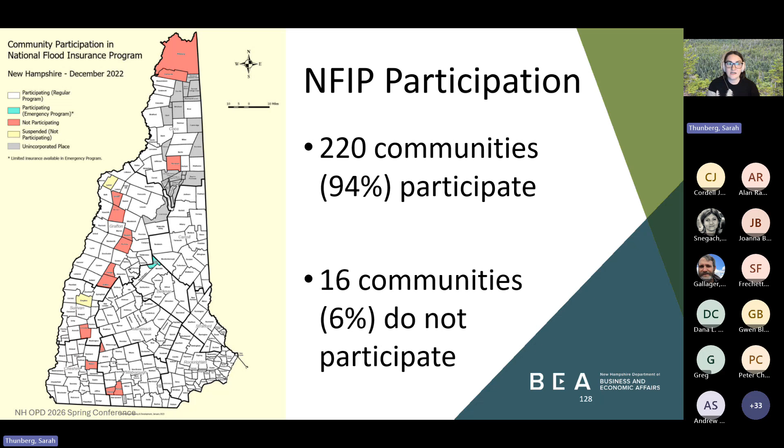We have 94% participation in New Hampshire, which is really, really great to see. And on this map, everything shown in white is considered a participating community. Red is not participating, and any yellow communities are suspended.

So there are different roles and responsibilities depending on the level of government you're working at. So I'm going to start with going over the federal responsibilities, aka FEMA's roles and responsibilities. So FEMA is the entity that makes the flood insurance through the National Flood Insurance Program available for all participating communities. And this includes property owners, residents, and renters in the community.

FEMA is also responsible for identifying the flood risks through mapping the floodplain and providing guidance on safe development and construction in floodplains. And then that translates to establishing development standards and providing guidance on safe flood-informed development within the floodplain. And then finally, FEMA is monitoring compliance for participating communities to ensure that all of the communities in the National Flood Insurance Program are administering the same minimum regulations.

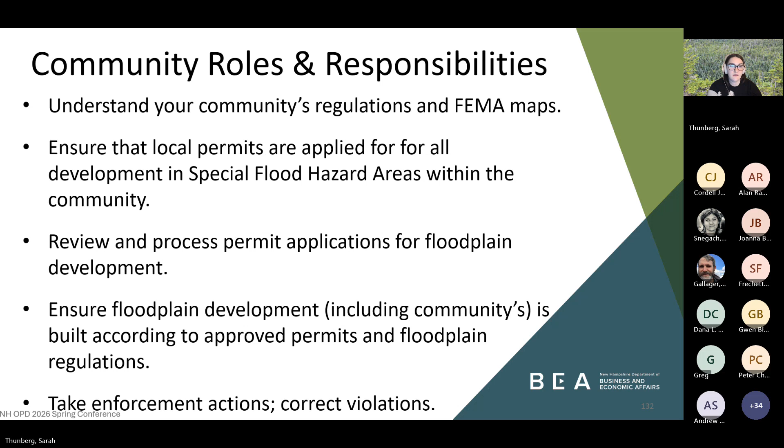Sometimes a community is not adequately enforcing their floodplain regulations, and if this occurs for a prolonged period of time, or it keeps coming up, then FEMA may consider suspending the community. In general, if a community gets suspended, property owners will not be able to purchase NFIP flood insurance policies, and all existing policies will not be able to be renewed.

Federal grants or loans for development will not be available in identified flood hazard areas under programs administered by federal agencies such as the Department of Housing and Urban Development or the EPA and the Small Business Administration. All of those loans would not be eligible for suspended communities.

Federal disaster assistance for flood damage would also not be provided to repair insurable buildings that are located in identified flood hazard areas. Additionally, if there aren't a lot of policyholders in the community, suspension can impact future property sales, such as if a home is in the floodplain and the buyer cannot get insurance, they might choose to not close on the house.

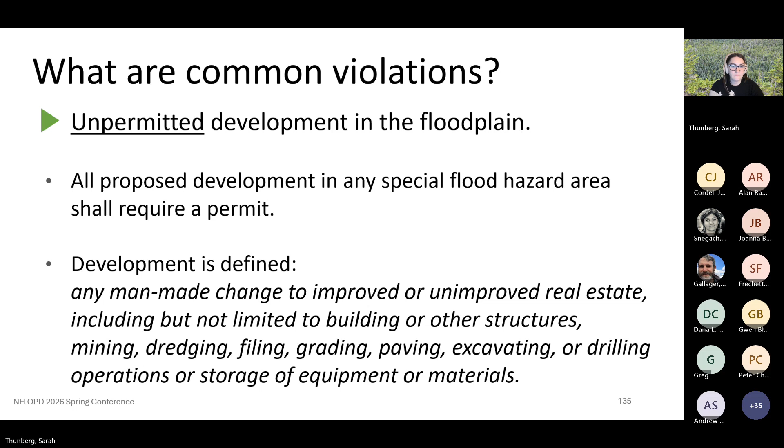So one of the common examples of unpermitted development is that structures are either being constructed or were constructed without a permit. This means that they may not meet the building requirements included in the floodplain regulations. Another example is improvements to structures without a substantial improvement or substantial damage determination.

So every existing structure in the floodplain must have a determination made for any improvements. There are a few exceptions to that rule, but generally, a substantial improvement determination is always needed. Substantial improvement just means that if you improve a structure within the floodplain by 50% of its market value or more, then regardless if that structure was built before the flood insurance program existed, that structure would then need to be brought into today's floodplain management standards.

On the other side of it is substantial damage. So if there's a structure that was damaged by more than 50%, it would also have to be brought into the modern day floodplain regulations. And a lot of communities after a disaster happens will have many structures that have been damaged and can sometimes miss the requirement to do a substantial damage determination for all those structures. And it does take up a lot of time.

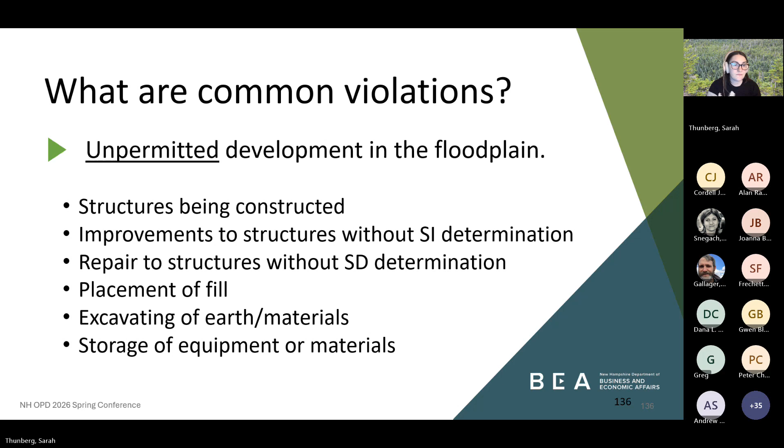So the second category of common violations is that the development in the floodplain does not follow the permit that was issued by the community. We see this a lot. So we're going to spend some time talking about this type of violation in the following slides, but some examples can include the lowest floor or the lowest horizontal member of the structure being below base flood elevation or freeboard.

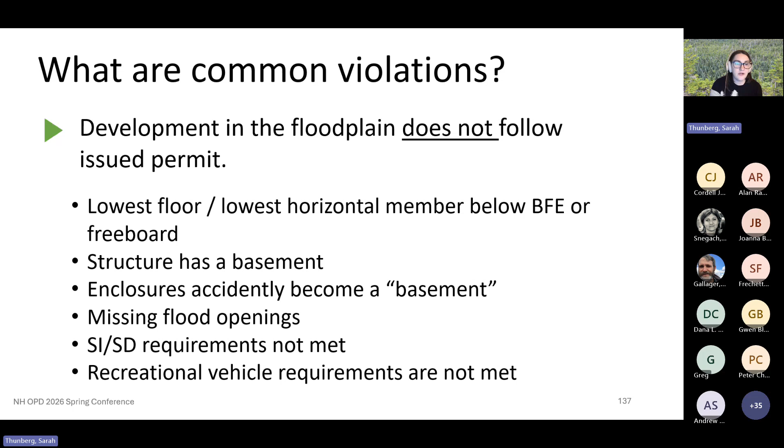Another is when the structure has a basement or accidentally becomes a basement, and it could be missing the required flood openings. Another one that I had talked about in the previous slide is substantial improvement and substantial damage requirements not being met. And another one that can get communities is recreational vehicle requirements not being met. So we're going to go over each of these in the next slides, starting with the lowest floor or the lowest horizontal member of a structure.

So in A zones, which are all of the inland zones, the top of the lowest floor must be at or above the base flood elevation. And so adopted in the community regulations for A zones, the top of the lowest floor should be at or above the base flood elevation or the design flood elevation if your community has adopted higher standards.

Now, for V zones, which are coastal zones, there are a little bit higher standards for these, just because the wave action that comes from the ocean puts more strain on the structure. And the requirement for V zones is that the bottom of the lowest horizontal structure member must be at or above the base flood elevation, or the design flood elevation. And this is not an approximation.

To determine these elevations, you must submit as-built elevation data provided post-construction by the property owner to ensure that the bottom of the lowest horizontal structure member is at or above the base flood elevation, or higher if a community has a higher freeboard requirement.

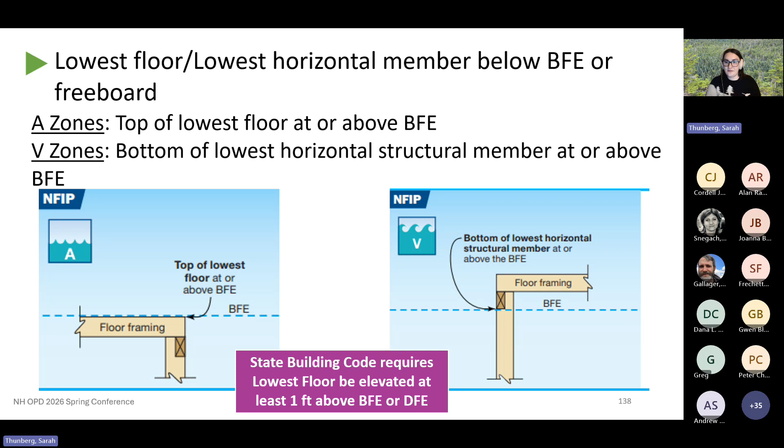All right, so something that gets a lot of homeowners is having a basement in the floodplain. So basements, as defined by the National Flood Insurance Program, are any structure with an enclosed area below grade on all 4 sides. Now, on any new construction or substantial improvement, this is not permitted in the special flood hazard area. This is to avoid the bathtub effect, where water may be able to flow into the basement and not be able to get back out after a flood. And this can create a pressure imbalance on the foundation that can ultimately impact the structural integrity of your foundation.

I do want to clarify that this is for new construction or substantial improvement of structures in the floodplain. If a structure is in the floodplain and has a basement, depending on when it was built or what work has been done to it, a basement doesn't automatically equal a violation. It would just be for any structure built after the community joined the National Flood Insurance Program and any properties determined to be substantially improved regardless of their age.

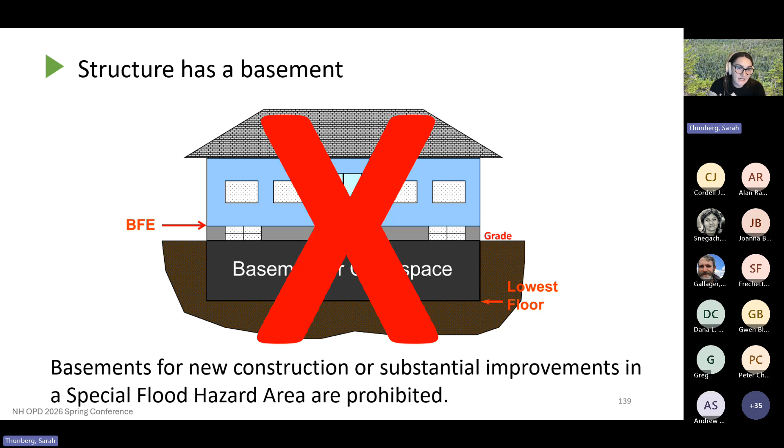So yeah, basements not allowed in the floodplain, but not everything is necessarily a basement. So there are things that the National Flood Insurance Program considers enclosures. And enclosures are defined by FEMA as an enclosed walled-in area below the lowest floor of an elevated building. But the enclosure must not be below grade on all sides, because that would make it a basement. The enclosure must be used only for storage, building access, or parking.

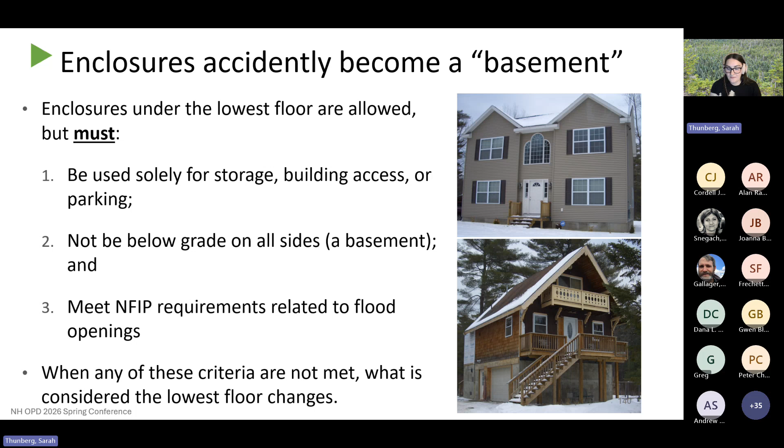If any of these criteria are not met, then what is considered the lowest floor is going to change to include that enclosure. And then if that occurs, the lowest floor requirements for elevation may not be met, as we have previously talked about. So generally, the lowest floor means the lowest floor of the lowest fully enclosed area, which includes a basement.

All right, so V zones, remember those are coastal zones, have slightly different requirements. This is because of that need to account for both tides and the velocity energy of the waves themselves. So an enclosure in a V zone must be free of obstructions or constructed with breakaway walls, open lattice work, and again, they can only be used for parking, building access, and storage.

This is especially important in your V zones because these are what's going to be impacted the most by any coastal storms or high tide flooding. And the coastal areas generally just have a greater risk for structural damages due to flooding.

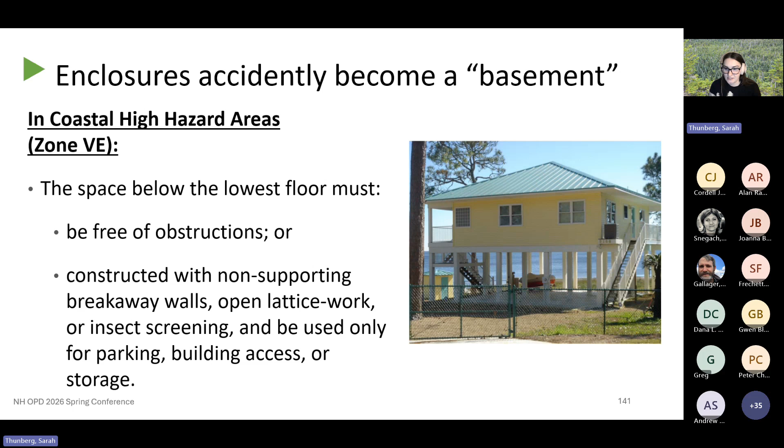All right, so I talked about flood openings. Now, some people can get a little confused as to what these are and what they're supposed to be used for. So, flood openings are required for all fully enclosed areas below the lowest floor of a building that is below the base flood elevation in a special flood hazard area.

Now the flood openings are to allow water into the basement during a flood, because when a flood happens, that water is going to rise up against your foundation and it's going to be pressing on your foundation. And if there's only air in your basement or the enclosure, then your foundation is likely going to crumble and fail. So the flood vents allow that water to go inside your foundation, and that way it's pressing equally as hard on both sides of your foundation. That way there's not a pressure imbalance and your foundation should remain structurally sound.

And then generally you will pair a flood opening with a sump pump, which will then remove the water from the basement after the flood waters have receded. So a lot of people can get confused on that, which is why I just wanted to take a moment to discuss what they're supposed to do.

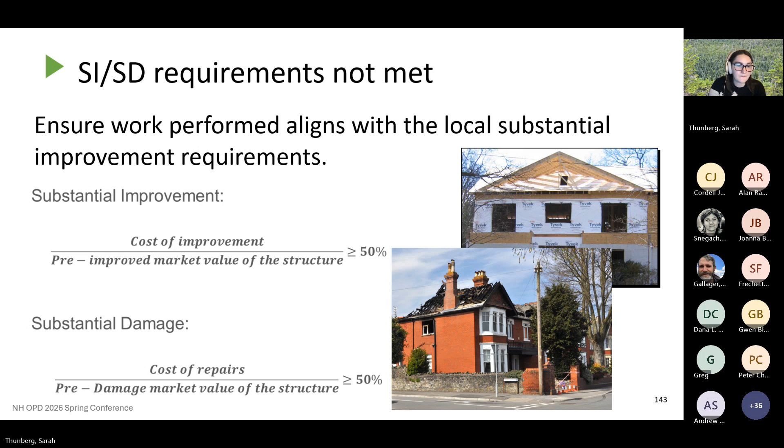All right, so the last common violation that I want to talk about today is recreational vehicles. So recreational vehicles, for FEMA's purposes, must either be on site for fewer than 180 consecutive days. And yes, that does mean that it can be driven off one day and then be back for the next. But it must be fully licensed and ready for highway use. And there must be no structures attached to the RV.

These regulations are intended to ensure that if flooding were to occur, the vehicles can be moved quickly out of the area. And if these criteria are not being met, then the RV is essentially a manufactured home at that point and then must comply with the manufactured home requirements.

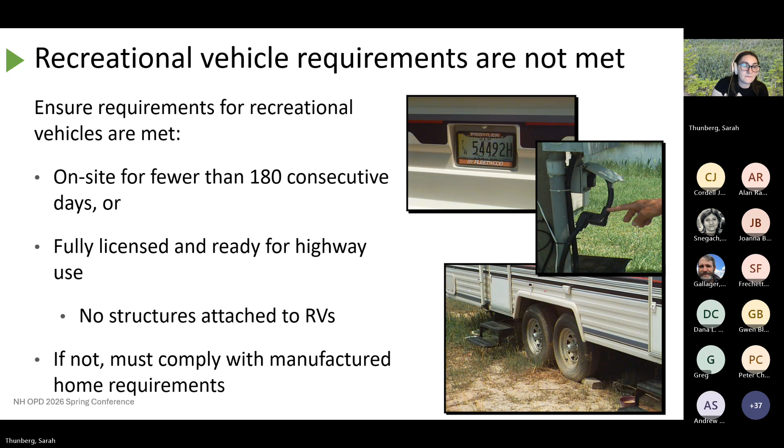All right, so now we're going to talk about best practices and tools for compliance. So I'm going to pass it back off to Stephanie for this section. Thanks, Sarah. So can everyone see the presentation okay still?

Thanks. So now we're going to be talking about best practices and tools for compliance, starting with ways to bring a structure into compliance. This acronym is called FRED, which stands for floodproofing, relocation, elevation, and demolition. So in the next couple of slides, we'll be talking about each of those. The first of those techniques is floodproofing, which is probably the most common. There can be either dry floodproofing or wet floodproofing.

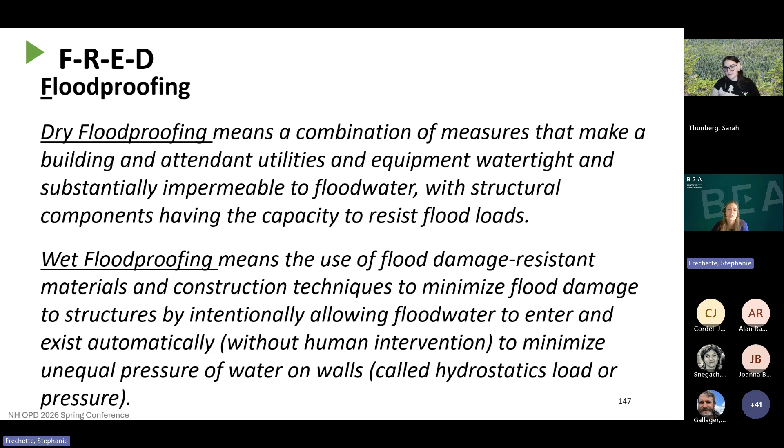Dry floodproofing is making a structure and its utilities and equipment watertight and impermeable to floodwater. Wet floodproofing means using techniques that allow floodwater to enter and exit automatically to minimize unequal pressure of water on the walls, typically through the use of flood vents. And just a note that dry floodproofing is not permitted in Zone Vs, which are coastal zones. More information on this is outlined in FEMA's Technical Bulletin number 3, which we do have available on our website.

Dry floodproofing can be used primarily for non-residential structures in A zones, and wet floodproofing is done on enclosures, garages, and accessory structures. And here we have a picture of a non-residential structure that's being wet floodproofed by retrofitting it with flood openings after Hurricane Katrina.

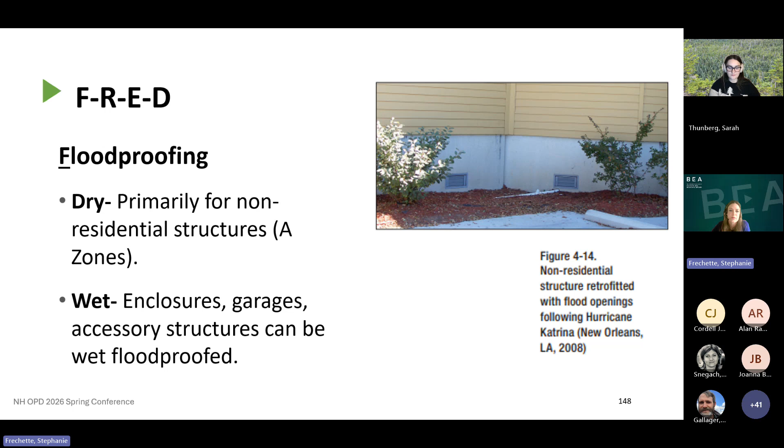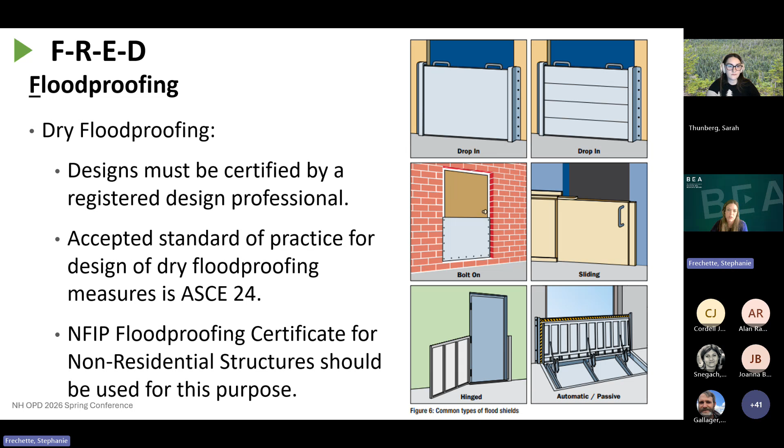Non-residential structures are permitted to be dry floodproofed through your local regulations, and if so, floodproofing designs must be certified by a registered design professional, typically a registered engineer. Any community should utilize the floodproofing certificate for non-residential structures for this purpose.

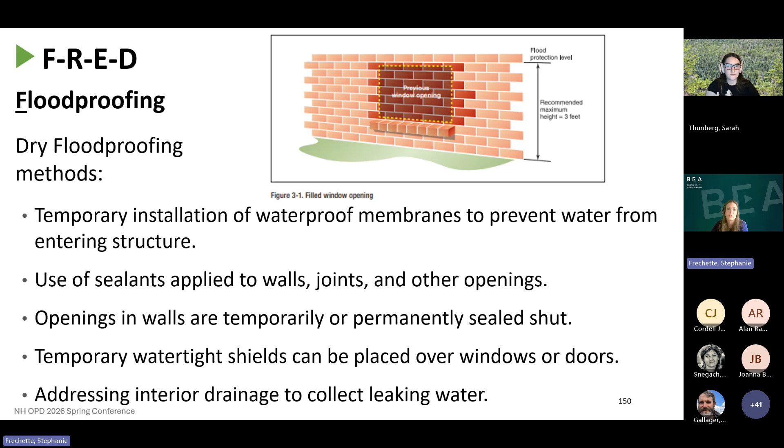Examples of dry floodproofing methods include temporary installation of waterproof membranes to prevent water from entering the structure, the use of sealants applied to walls, joints, and other openings, making sure that openings in walls are temporarily or permanently sealed shut. Temporary watertight shields can be placed over windows or doors, and addressing interior drainage to collect water that's leaking.

Wet floodproofing can be used on enclosures that are below elevated buildings, again with the use of flood vents. Wet floodproofing can be used on attached garages, agricultural structures and accessory structures, and historic structures and functionally dependent uses when authorized by variances.

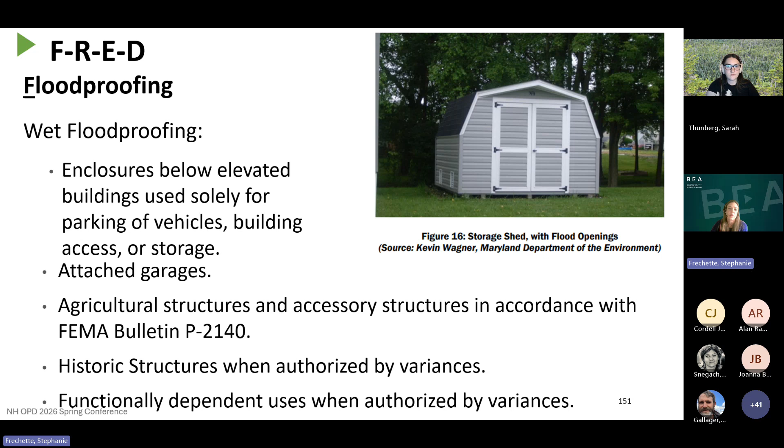A note on functionally dependent uses. This is a use which cannot perform its intended purpose unless it's located or carried out in close proximity to water. This term includes only docking facilities, port facilities that are necessary for loading and unloading of cargo or passengers, and shipbuilding and ship repair facilities, but does not include long-term storage or related manufacturing facilities.

And here's some floodproofing resources from FEMA, and they're all linked here for your reference.

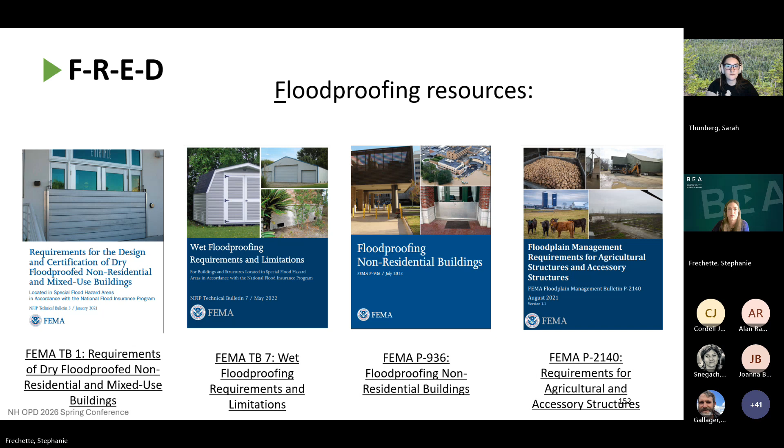The R in FRED is relocation. So depending on the situation, relocation may be an option as it provides the greatest security when the flood hazard is severe. It can also reduce flood insurance premiums, although this method can be very costly.

Relocation can be appropriate in areas where the flood hazard is severe, such as in deep water, if there's rapid rates of rise and fall, short warning times, wave action, high velocity flow, high debris potential, long durations, or erosion.

Relocation involves lifting the structure, putting it onto a flatbed truck, hauling it to a new site, and lowering it down onto a new foundation. So not surprisingly, this can be a very expensive mitigation method, but it is an option.

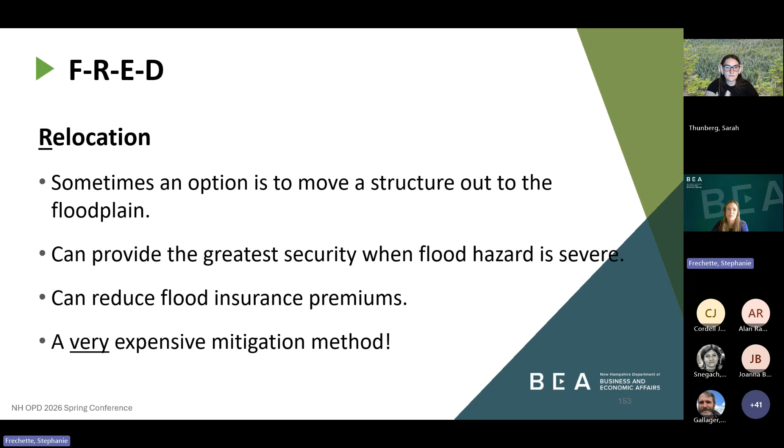Next is elevation. This is to raise a building to or above the flood elevation level that is adopted by the community. Depending on the specific situation, sometimes it's only the utilities that need to be elevated or a portion of the structure that needs to be elevated to bring it into compliance.

Typically, the process of elevating is to separate the structure from the foundations, raise it on hydraulic jacks, and the structure is held by temporary supports while a new or extended foundation is built below. This is a good method for structures that were originally built on basements, enclosures, or open foundations. If a structure is determined to be substantially improved or damaged, elevating it may be the solution to bring it into compliance.

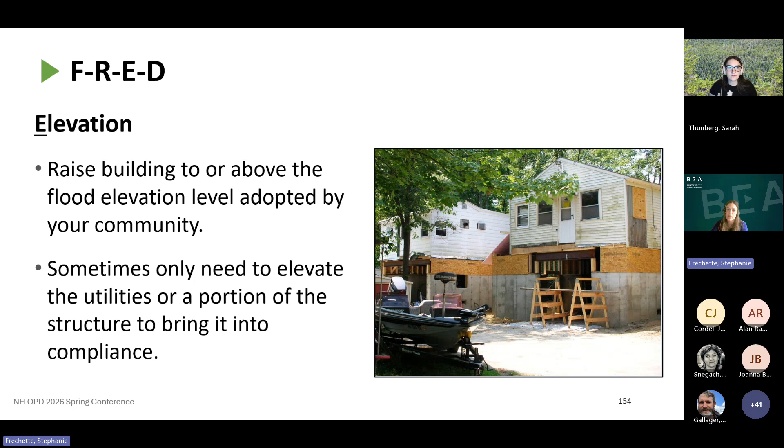And the last method under this acronym is demolition. Depending on the specific situation, especially if a structure is severely substantially damaged, this may be the easiest way to bring the structure into compliance.

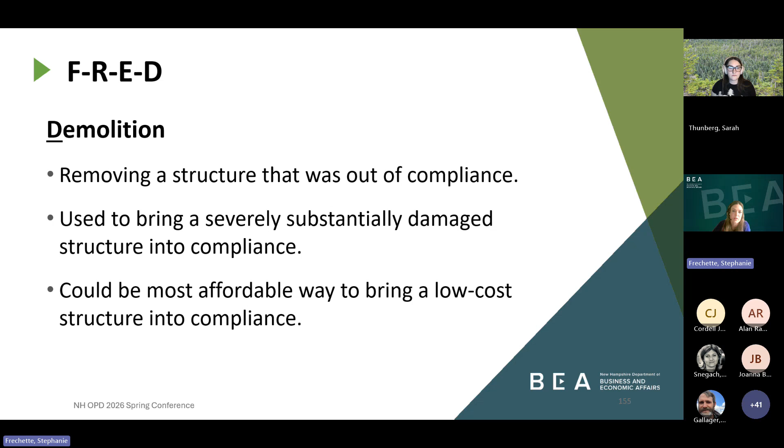So we just talked about some ways to bring a property into compliance, including floodproofing, relocation, elevation, and demolition. Some other tools for compliance include your community having enforcement procedures for correcting violations. Part of a community's responsibility to participate in the National Flood Insurance Program is to enforce local floodplain regulations that are adopted by the community, and this is done by issuing and resolving violations.

Communities may become aware of a violation through a complaint or a notification from FEMA, and in both situations, FEMA expects communities to exhaust all possible enforcement actions to correct that violation. At OPD, we are working on guidance to help you establish a procedure to follow that helps you identify and correct violations in your community regarding your floodplain ordinance. So the next couple of slides will be what those steps look like.

In general, the process can look like issuing a violation, which would be mailing a formal written notice of violation or cease and desist order to the violator with a deadline for compliance, and making sure to cite the code sections that are being violated. Letters should be sent through certified and first-class mail, and hand delivery may sometimes be necessary. The violator has a right to appeal a community official's interpretation of the zoning ordinance to the Zoning Board of Adjustment.

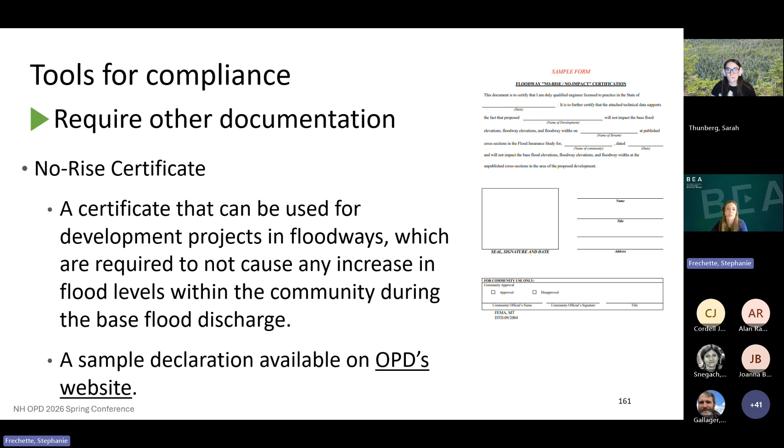Another documentation is a no-rise certification. Development, both building and non-building, is only permitted in the regulatory floodway provided there is no rise of the base flood. That typically requires a hydrologic and hydraulic study to prove, but this certificate can be another tool utilized to ensure the community is meeting its floodplain regulations. Again, I'd recommend if a community chooses to adopt this form to incorporate it into an existing procedure so you're being consistent to all property owners moving forward.

Another documentation is a flood opening certificate to be used in situations where it's not feasible or desirable to meet the minimum opening criteria as detailed in a community's floodplain ordinance. This document, like the ones before, must be signed and certified by a licensed professional.

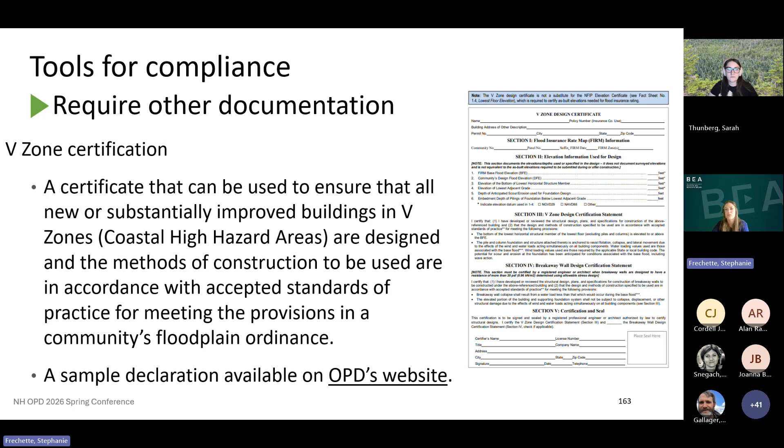The last documentation is a V-zone certificate to ensure that all new or substantially improved structures in V-zones are designed and built to meet the community's floodplain regulations. This is not a substitute for an elevation certificate. It's just another tool for ensuring compliance of new or substantially improved structures.

During the second inspection, this is done before installation of the lowest floor. You need to ensure that the lowest floor will be built at the height stipulated in the permit application and that the foundation is the type specified in the plans. Once the foundation is poured or laid, it can be very expensive for the property owner to make changes to the building location or the elevation of the lowest floor.

And for the third inspection, this is done as the project is nearing completion. So you should be checking that the foundation and the floor elevation has not been altered, obtain the as-built elevation or floodproofing certificate, verify enclosures below lowest floors have adequate openings, check for breakaway walls in V zones, and check for floodway encroachments. You may also consider taking photos during final inspection to document compliance and retain that in the permit file.

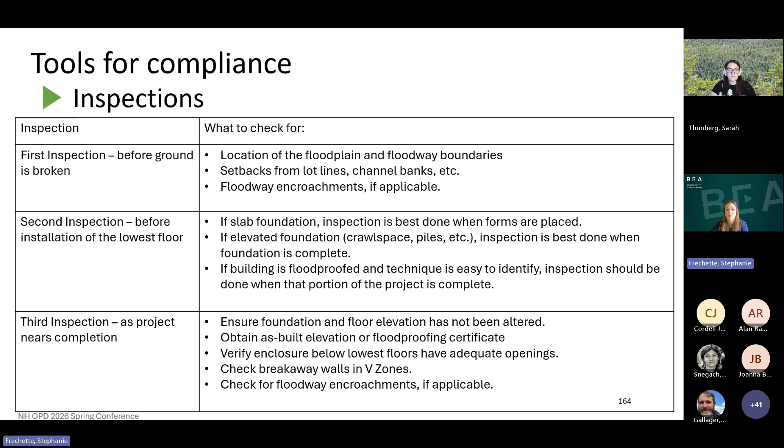There are legal tools for compliance. Examples can be fines, stop work orders, and withholding a certificate of occupancy. You should keep evidence of these violations. This is usually in the form of files, correspondence, and pictures. Try to ensure that your evidence is telling a story and adequately shows the violation. And it's also helpful to log your phone conversations, keep your emails, and keep a good paper trail.

Any legal action should be discussed with your municipal attorney. It's important to explain why it's important for the community to stay compliant and in good standing with the National Flood Insurance Program and not become suspended. You can ask what tools are in place to use if a violation is found, and remember to have everything documented.